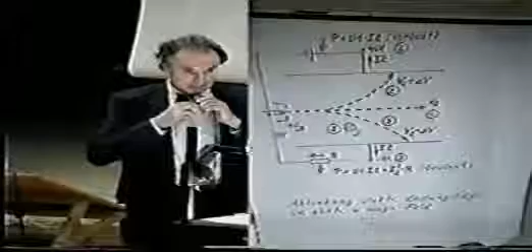Since several years I have received the press releases from Stan Meyer of the Water Fuel Cell Corporation. When I was asked to invite some US participants to this conference, Stan Meyer came to my mind immediately. So I wrote him a personal letter, and I'm very happy that he came over. He has about 40 patents related to energy. He is one of the most brilliant inventors, and I want to make this introduction very short to give him more time to present his water fuel cell. Stan Meyer, please.

Thank you. Thank you. I got a button here, right? You got a button? No, this is a microphone. Yes. And there's a button, how do you turn it on? Kann jemand den Slide-Projektor anschalten, bitte? 2, 3, 4. Can you hear me?

Before I begin, I would like to make a few announcements. Number one, in 30 minutes there's no way you can present the entire technology of the water fuel cell, because it covers 40 major patents and some revolutionary new technology. If you're interested, we do release a publication on this. Please contact Ike, and he will give you the address of our laboratories and water fuel cell. It's basically an overall view of our technology. It does not get into the full technical aspect of the technology.

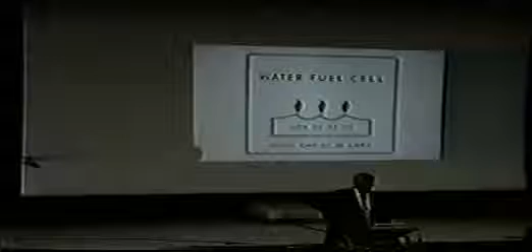Okay, back in 1975, I was very actively engaged in the retailing of truck parts, making well over $1 million a year profit. I'll try to go slower now. And when the Arabs threw the embargo on the United States, it alarmed me that a little country over in the Mideast could actually cripple the United States. Right now, based on the oil pressures in the existing fields of the world, whereby the United States dropped in oil pressure from 1965 to '75, we're now dependent on 60% foreign oil to maintain the industrial base of the United States.

The same thing that had occurred in the United States is also now occurring in the Arab fields, whereby their oil pressure is dropping three times faster than it occurred in the United States. The same thing that has been occurring in the Arab oil fields and that had occurred in the United States oil fields has also been occurring in the North Sea oil fields.

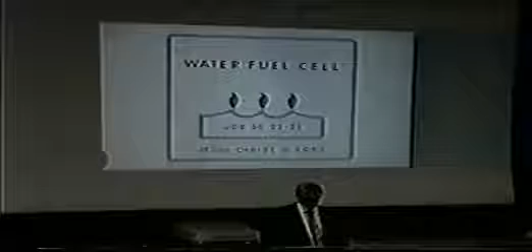And so therefore, back in 1975, it was imperative that we must come up with some form of alternate energy source if the economic base of the country is to survive. You have been hearing many new principles of technology at the Energy Symposium. Now let's take some of the knowledge that has been presented to you and see if we can't come up with an apparatus capable of using water as a new fuel source, both for its application and utilization of gas energy as well as electrical energy.

And I put the logo on there because the Lord, when he was talking to Job, asked him if he had known anything about the characteristic and knowledge of water. So the Lord really specified that the knowledge of water would come out at a time of great trouble.

In order to bring a new energy system into the country, it could not take one major or master patent to solve the energy problem. It had to take a myriad of many inventions integrated together to come up with a universal power system that could literally be utilized anywhere in the economy. What good would it be to develop a system that would provide home heating if we could not get the cars and trucks on the road moving with a new fuel source?

Or what good would it be if we put energy into industry, yet farmers would not have energy to process or plow their lands and harvest their crops? And if we had no way to apply an energy system to the military integrity base of the United States and other countries of the world, we would have a tremendous problem. So the main thrust in development of the water fuel cell technology was to hit every area of the economy and move in a bilateral movement in case and when the oil shortages start to hit.

We live in very unsecured times. Very shortly you will see tremendous vexation of lack of energy and the lack of energy supplies.

In my files back home in my laboratories, I have the most scientific compilation study on hydrogen that has ever come out of the scientific world through NASA, where the United States government spent more than $10 million to tell me that hydrogen was the most advanced, best or ideal fuel source that could be used and brought into the economy very quickly. But the report specified that there were three major areas that had to be addressed.

Number one, be able to produce the hydrogen gas economically, control the rate of its production, adjust the burn rate of hydrogen gas to co-equal that of the fossil fuels, and I added a fourth one: the ability to transport the hydrogen gas without spark ignition.

And of course I own all the patent rights both nationally and internationally on this technology. Not only have I been filing the patents on its base technology, but I've also been filing patents on the related technology, giving me a technological buffer zone to bring the technology into the world market area.

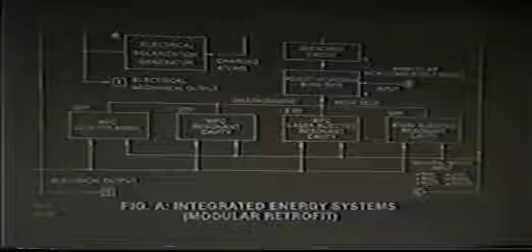Some of the major arguments that I used in the United States in releasing this technology was: gentlemen, number one, what happens if a foreign power can come into your land and use your own existing laws to block this technology from coming into existence? And of course, presidential executive action came into being to guarantee the processing of patents not only for the United States but even for the world.

Next argument was: gentlemen, if you do not have an economy, you will not have a government. If you do not have a government, you will not have a military. So it's the same type of arguments that I have been using in negotiating with many leaders throughout the world.

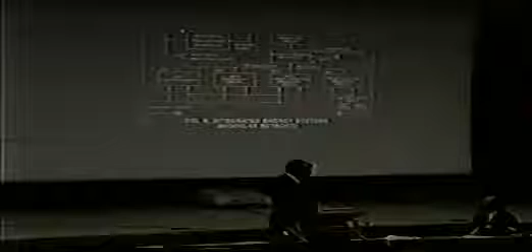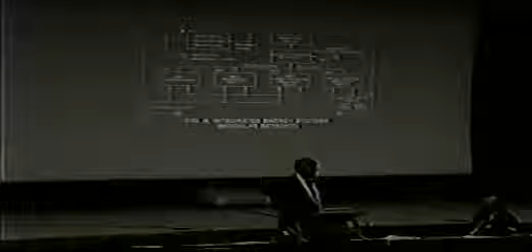The red zone signifies the development of hydrogen to be able to utilize it as a fuel source and render it safer than that of natural gas, and as a result use the water fuel cell technology as a retrofit energy system. It was paramount that this technology would have to be applied to existing energy consuming devices like your cars, your trucks.

We do not have the time, the energy, nor the monies to be able to convert the cars and trucks over to new power systems. It has to be a way that we can use a fuel source that we can very readily get ourselves available to, and water seems to be the most abundant fuel source on the face of this earth, if we can be able to release that energy from water economically.

The first thing that was confronting us was the fact of how in the world we could be able to switch off the covalent bonding of the water molecule without consuming a tremendous amount of electrical power, as opposed to the electrolysis process that we all know.

What we addressed was, number one...

First thing we considered was how in the world can you naturally be able to switch off the covalent bonding of the water molecule without consuming a tremendous amount of electrical energy.

So when we looked at the water molecule, we realized that when the hydrogen atoms unite with the oxygen atoms, under the law of physics, something's got to happen. When the oxygen atom accepts the hydrogen electrons, you develop an electrical imbalance by which you now have 8 protons as opposed to 10 electrons, so the oxygen atom takes on a negative electrical charge. Since the hydrogen atom is now sharing its electron, and since its proton is positively electrically charged, the hydrogen atoms will take on positive electrical charges. Therefore, the atoms of the water molecule are held together by an electrical attraction force.

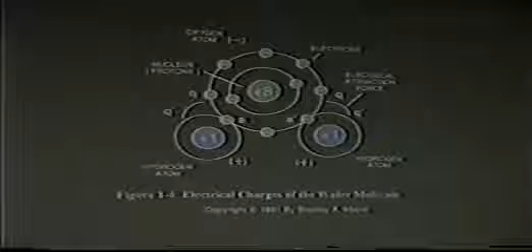We realize that as you expose the water molecule to a high pulse voltage frequency, and as you raise the voltage amplitude, we can take the water molecule into the liquid to gas ionization state. In the process, we restrict the amps and allow voltage to take over.

At the same time that we are exposing the water molecule to an external electrical force of opposite polarity to perform the work of splitting the water molecule, since water is a dielectric liquid... that's almost impossible.

Natural water is a dielectric liquid, and as such, when you expose the water to a high pulse voltage frequency, the water will actually take on an electrical charge.

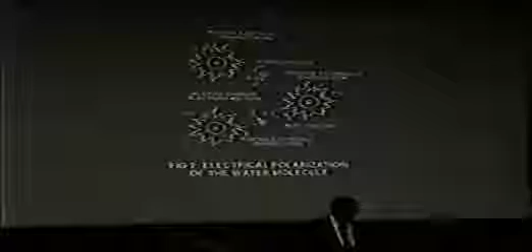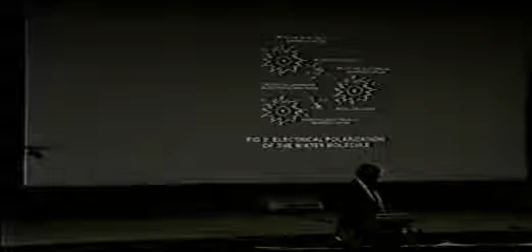So at the same time that we are splitting the water molecule by allowing the water molecule to elongate and change the time share rate of its electron, as the water takes on the electrical charges, the hydrogen positive electrical charges will increase at the same time that the negative electrical charge of the oxygen atom will increase. As a result, the negative charge electron, which is its covalent electron, is now being attracted to the positive charge hydrogen atom.

And since the oxygen atom has a negative electrical charge, a repelling action occurs, and therefore we are now switching off the covalent bonding of the water molecule, satisfying the first major requirement of NASA: being able to release hydrogen gas from ordinary natural water and do it economically.

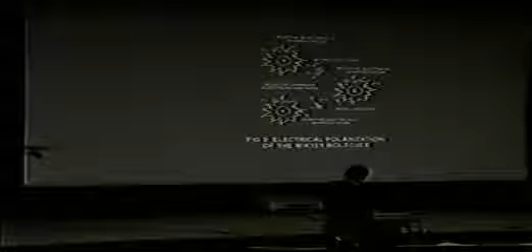This was one of the apparatuses which we had shown under rule 101 in the United States Patent Office and the World Patent Office, coming in to show operability. If you show operability, you receive your patents.

The water fuel cell technology is 180 degrees out of phase of the electrolysis process. We set up an environment.

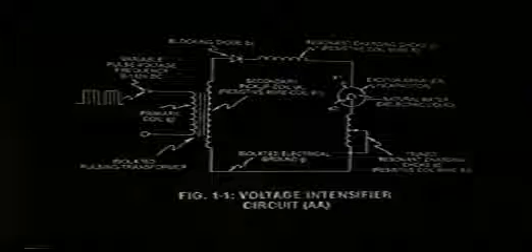So we're now putting two coils on opposite sides of the capacitor, forming a pulse frequency circuit by which, once you hit the resonant frequency of natural water, amp flow drops down to a minimum, allowing voltage to take off to infinity if the electronic components will allow that to take place.

Basically, what we're doing in the pulsing circuit is that as it enters into the resonant charging choke, it creates the electromagnetic field, which restricts amp flow to allow voltage to perform its work.

Now, in physics, we know, and have known for a long time, that voltage does in fact perform work. But heretofore, no one ever dreamed of using this technology to liberate hydrogen economically from water. So we're now restricting the amp flow and allowing voltage to take over.

We found out that once you restrict the amps and allow voltage amplitude to increase, hydrogen gas was being generated on an exponential function.

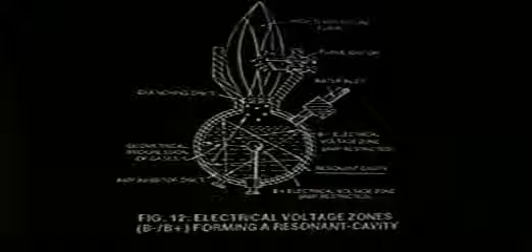Once we realized the fundamental operational characteristics and parameters of the electrical polarization process, we now raise the voltage amplitude by which we take the water into the liquid to gas ionization state. As we do so, the voltage potential is now ejecting or pulling away the electrons from the combustible gas atoms.

We found out that when you attenuate voltage amplitude in reference to pulse frequency, you will hit the phenomena of resonant action, by which you are producing a tremendous quantum leap in hydrogen generation over the prior art.

We also found out that once you hit resonance and subject it to the stimulation of the pulse voltage and then switch it off, the hydrogen will continually be produced on the power output stage. For example, once you hit resonance, we could excite it for 5 seconds and you're producing gas for 94 seconds. You divide 5 into 94, we were producing hydrogen gas 19 times more on the power output stage than on the power input stage.

We also realized that if you leave the pulse voltage frequency continuous or constant and don't touch the apparatus, hydrogen gas is now being produced on a geometrical configuration and will continue to increase in production until you reach the maximum flow rate of water going into the resonant cavity. So we now have another form of control for regulating hydrogen gas production.

These operational parameters now satisfy the second major requirement of NASA to use hydrogen as a fuel source: that we can control the hydrogen gas on demand.

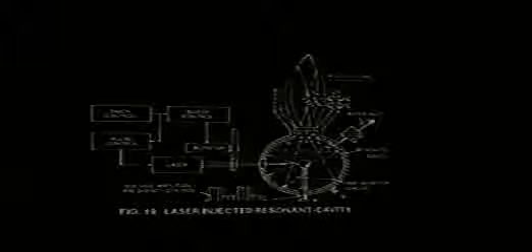We are now starting to aid the electrical polarization process by injecting laser energy into the system. By doing so, we're now causing an even faster and greater rate of hydrogen production to occur, as you see right here.

But we are also doing something else. We want to take the combustible gas atoms to an even higher energy state. This is an example of a laser injected resonant cavity.

Those cavities themselves like to be extremely small since they're taking on a form of capacitor. We use solid state lasers for injection of photon energy into the process. In electronics, these are simple little LEDs, light emitting diodes, but they will produce a coherent light. We don't need a large light intensity to accomplish the task.

We don't want to focus the energy down to a concentrated point. We want to allow the light, or the photon energy, to be absorbed by those liberated combustible gas atoms.

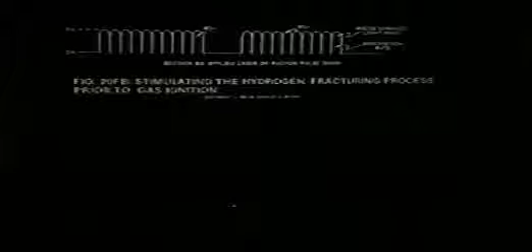There's an example of what happens when you subject water molecules to a high pulse voltage frequency and allow the laser pulse frequency to be superimposed within the process.

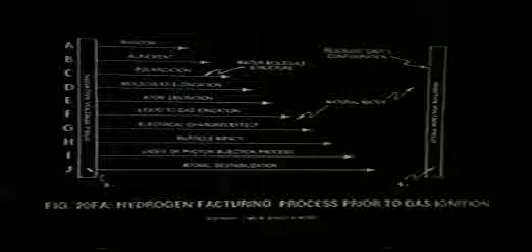As we started our experimentation, we realized there were many phenomena occurring in order to bring about the results of using hydrogen as a fuel source: going from the random state to the alignment, to the polarization, to the molecular elongation, to the liquid to gas ionization state. But we are also going down to the atomic destabilization of the water molecule.

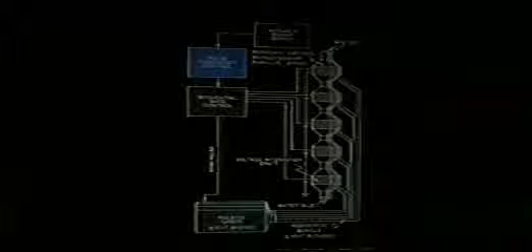For example, you can subject it to 110 volt pulse frequency, and yet you are compounding the increase of voltage equivalent to 1,000 volts in the upper resonant cavity. There's an example of a 3-tier resonant cavity configuration.

Now, once we found out that we can use hydrogen as a fuel source and release it and control its rate of production - hydrogen is extremely volatile, as we all know. If you ignite it with ambient air, it burns around 325 centimeters per second. The blue zone signifies the ability of rendering hydrogen safer than natural gas.

This is the number one area that gave us the ability to retrofit hydrogen to any existing energy-consuming device and do it economically, because if I can adjust the hydrogen burn rate to co-equal fossil fuels, then it is not needed for me, for example, to change the design configuration of an internal combustion engine. But we also had to comply with both federal, state, and local highway safety code regulations to render this type of fuel cell safer than water.

We addressed the phenomena of natural water, that water is like a sponge. It will absorb ambient air. Those who have gone fishing know that if you look at the gill of the fish, it simply agitates the water molecule to release the dissolved air.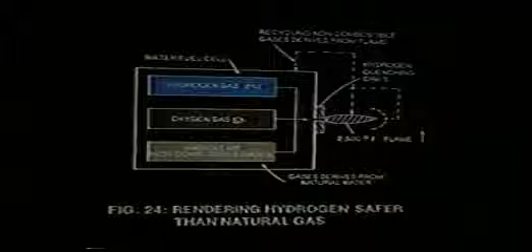This is an example of now sustaining and maintaining a hydrogen gas flame from ordinary natural water. The flame is burning around 42 centimeters a second. In the prior state of the art, that was totally, absolutely impossible.

Normally, when you burn hydrogen and oxygen, you cannot see it, nor smell it, nor taste it, because it's a very clean burning fuel. You'll see a small portion of the flame, actually being projected around 9 inches in height. The flame temperatures we have achieved range from 5,000 up to over 20,000 degrees.

The question now being asked is, we can sustain high temperatures to melt steel, but why does it not spark back into the generator? In all probability, if NASA had had this technology, our astronauts would not have died in vain.

But I was developing the technology when the accident actually occurred. And of course, I could tell you some very interesting happenings of events, like blowing a hole in the living room floor. I always believe in a moment of adversity there's something to learn.

So I knew I had to come up with a fail-safe fuel cell if it was going to be a viable energy system to put into the economy. So the quenching circuit technology was developed.

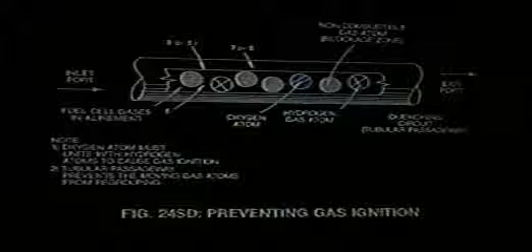Therefore, we came up with a very simple anti-sparkback device that was not dependent either on gas pressure or gas volume. In other words, anti-sparkback, or preventing a sparkback into the fuel cell, was now 100%.

As you see the small holes in the center of the disc, they form the quenching circuit. The disc itself is made out of ceramic material. The reason we used it is because we do not want the hole size to be elongated, and ceramic materials were extremely ideal to prevent oxidation from occurring when the liberated hydrogen atoms would go through other materials such as brass or steel.

We took that technology and extended it to form a quenching tube, by which we now can transport the hydrogen and oxygen gas. We can literally burn it, send a tracer bullet through it, and you will not ignite the gases going back into the fuel cell.

This solved the next major requirement of NASA, being able to transport the hydrogen gas without spark ignition.

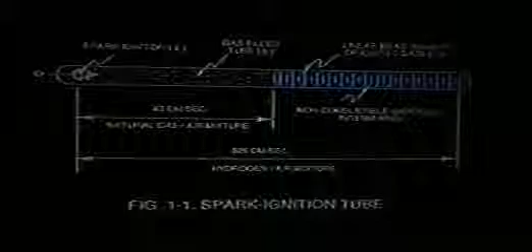This is an example of adjusting the burn rate of hydrogen gas. Irregardless of whoever comes up with a hydrogen generator, they're going to have to go through our patents. To give you a classical example, in a tube, if I would put hydrogen and ambient air in it and ignite it at one end, it would travel 325 centimeters a second.

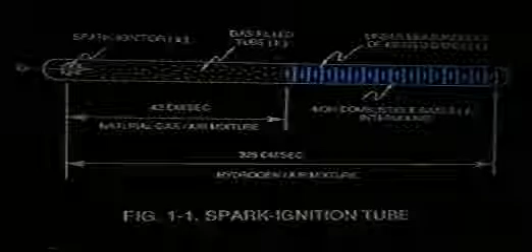Now, everybody knows about stoichiometric configuration. When I filed the patents in the United States Patent Office, they came back and said, 'Stan, we don't know what you're talking about, the adjustment of the burn rate of hydrogen gas. We understand stoichiometrics.' I said, 'Well, if I illustrate it to you, will you allow the patent?' He said, 'Absolutely.'

So we found out that hydrogen with ambient air will burn at 325 centimeters per second. We took natural gas as an example, put it in the same condition, and sparked it, and we found out that it would burn around 42 centimeters a second.

So it became very obvious that if I would mix non-combustible gases with the hydrogen and oxygen gases coming out of the fuel cell, I would use the non-combustible gas as a modulator to regulate the speed by which the oxygen atom would unite with the hydrogen atom. As a result, I now have the ability to adjust the hydrogen burn rate to co-equal that of all the fossil fuels, and I can adjust the hydrogen burn rate down to that of burning leaves or paper.

That gave me now the economics of being able to retrofit the fuel cell to any existing energy-consuming device in the economy. As a businessman, I am also a research and development engineer. You will see a videotape showing a dune buggy running on water.

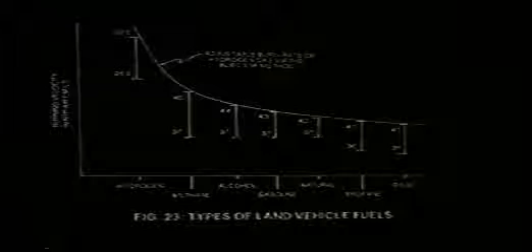I knew that I had to comply with the law of economics, which strictly means that the guy who comes up with the most economical way is going to win out. There are a lot of Cadillac ideas that come into existence, but they do not get out in the marketplace because they violate the law of economics. So the development of the technology was done under the premise: keep it simple. Use the KISS method. Keep it simple, stupid. Anyone ever heard of that?

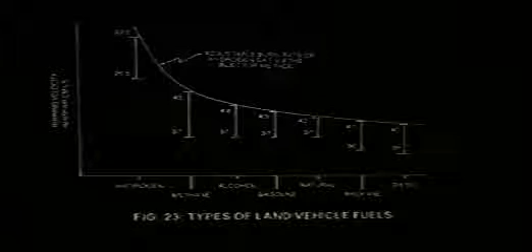Now we found out that as we were processing the gas, we were producing tremendous high temperature flames. But I was confronted with the fact that if I hooked the fuel cell up to a stove, the wives would get really irritated and mad at us, saying, 'Look, you burn holes in our pots and pans.' So the next step was, how can you adjust the burn rate to go from 5,000 degree temperatures down to 200 or 300 degrees, and do it under the law of economics?

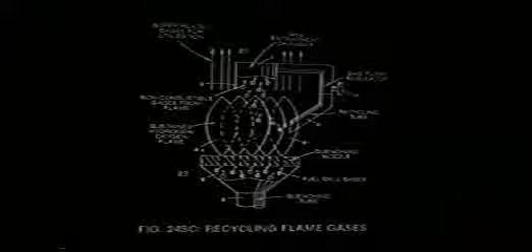It was very obvious that the gases coming out of the fuel cell could be recaptured, going through the flame, recycling back into the flame or back into the generator. As a result, by regulating the flow rate, we can now adjust the burn rate of hydrogen gas to any temperature level we desire. Now, since I'm using the gases coming off the flame, does it cost anything? No, zippo, other than the apparatus itself.

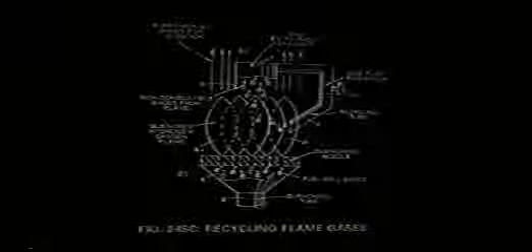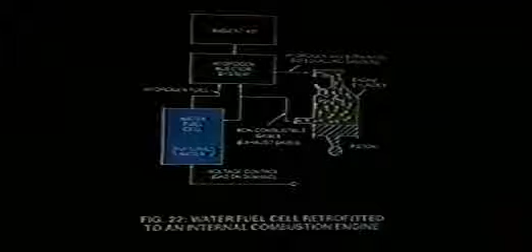Now, prior technology involved changing the design of the engine and the compression strokes, and trying to use very exotic materials. The key was that we need the cars and trucks to run. So how do we run an internal combustion engine? As an engineer, you look at this in three ways. Number one, the engine is a mechanical drive device. Secondly, it's an air pump—it pumps air through the carburetor and sends it out the exhaust.

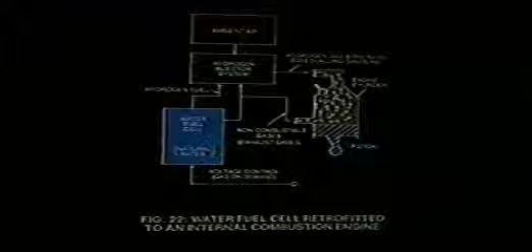Thirdly, you look at an internal combustion engine as a manufacturer of non-combustible gases. So we simply take the gases that have gone through the burning process, which has eliminated the burning product in the fuel and also eliminated the oxygen atom, and meter it back into the fuel cell. We're now automatically adjusting the burn rate of that hydrogen gas to co-equal that of gasoline or diesel fuel, and as a result you do not have to change any of the design characteristics on an existing engine.

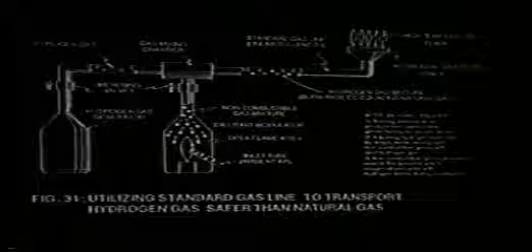We've now taken the technology to the point of being able to transport the hydrogen gas through a conventional gas grid system. Prior art dictated that you would cool the hydrogen down to around minus 400 and some degrees, put it under pressure, and transport it down the road by trucks. This type of technology now gives us the ability to transport the hydrogen gas through existing gas grid systems without even changing one piece of hardware.

We simply take the ambient air, which is one of the cheapest commodities on Earth, expose it to a flame to produce the non-combustible gases that now mix with the hydrogen gas, and as a result we can adjust the hydrogen burn rate to that of natural gas, or even adjust it lower. Therefore, we now have a very safe way of transporting hydrogen gas that exceeds the prior art of the technology.

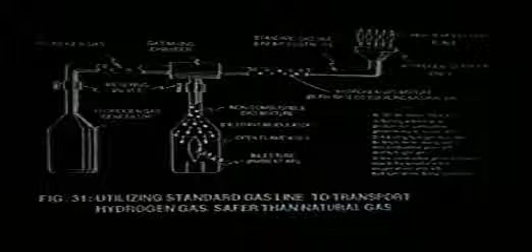Now we come to the point that, as we know, you burn hydrogen and oxygen, the byproduct is water, and so therefore we want to use and recapture the water and recycle it back into the generator. So inherently the fuel cell is a fantastic water purification device.

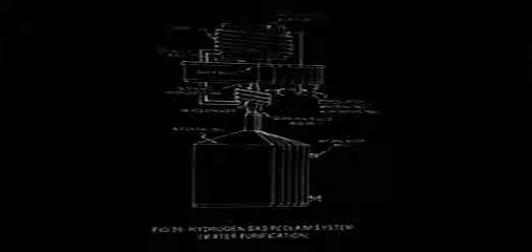To accomplish this, we now use the old method of gas-fired refrigerators, as you probably knew when you were young, where you take a flame and heat a gas, and as you circulate the heated gas through a gas expansion chamber, the gases expand and you get a cooling effect. So the superheated gases coming off the hydrogen flame are condensed down and cooled back into water vapor.

And since the electrical polarization pulls apart the water molecule by physical force, any contaminants in the water remain in the fuel cell. As a result, if any bacteria leaves the water and attaches itself to the liberated gases, it cannot and does not live through exposure to a 5,000 degree flame.

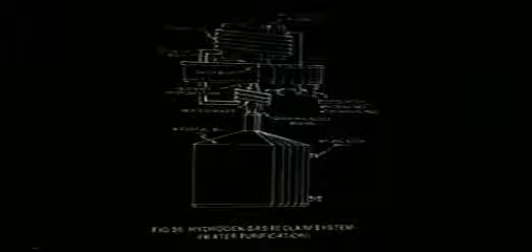So inherently, the characteristic of the fuel cell gives us the ability to purify water and even go into desalination of salt water, and do it in a way that we do not use any chemicals or filtration of any sort.

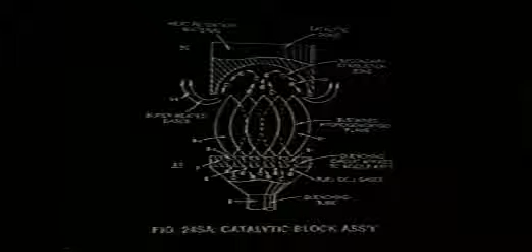In order to comply and ensure that we have a system that does not produce nitrous oxide, which would be minuscule in application, we expose it to a catalytic block, allowing the design of the hemisphere itself to redirect any gases back into the flame that may escape the combustion process. As a result, we have a way of converting 100% of the gases coming out of the fuel cell.

Now, this is an example that we've designed also to comply with Murphy's Law. Any of you who have done development know Murphy gets in the way. So in order to prevent leakage of hydrogen gas, we are adjusting the quenching circuit so that if you have a blowout, the adjoining flame will reignite the gases coming out of the fuel cell.

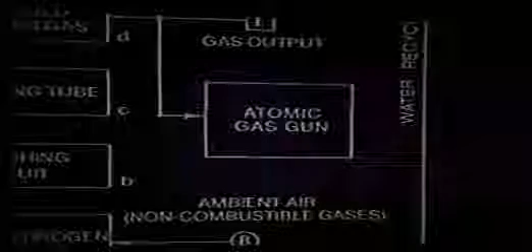Now, as we know, when you burn hydrogen and oxygen gases from water, the gas combustion process releases thermal explosive energy up to 2.5 times that of gasoline. But there is a phenomenal amount of energy in water if you are able to tap into it.

Einstein suggested that there was enough energy in water that you could literally take a 1,000-car train around the earth many, many times if you could tap into the process.

Now, we all know what happened to the nuclear industry. I was in Washington, D.C. in 1965 when they were trying to come up with a fail-safe nuclear power system. Three days into a meeting, I got up and said, 'Gentlemen, everything you have said in this meeting is a bunch of malarkey, because as you subject the radiation to our materials, you will have the hourglass effect.' Unfortunately, Three Mile Island occurred within the time that I had prophesied back in 1965.

But can we now tap into an even greater source of energy? When the Arabs threw the embargo on the United States, it alarmed me that if we would not get our cars and trucks on the roads again and start moving very quickly, the food supply chain in the United States was only 27 days.

When I made a technical presentation to General Bouchard at Wright-Patterson Air Force Base and General Abramson at the Pentagon, I said, 'Gentlemen, I want to remind you that during the Arab embargo, you only had 2.5 days of aviation fuel to fight a war. And I don't care how sophisticated an aircraft you have on the runway, if you have no way of powering that jet, it's a piece of junk.'

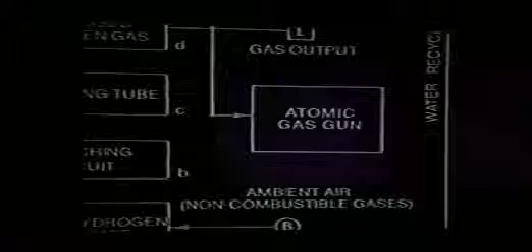Now, you know and I know the generals don't like to have their equipment called a piece of junk. So it's very important that we bring new technology into the economies of the world. We also have to be able to protect the military base of the United States.

So as we liberate the gases from water, we are now resubjecting those liberated gases to an even higher pulse voltage frequency. We are restricting the amps and allowing voltage to take over to perform its work. We are now injecting laser energy into the process to aid the ejection of the electrons.

When do we have to leave the airport? What time? 3:30. It's running out. Well, we'll go on. Yeah, we'll go on, okay.

So basically what I'm doing now is taking the combustible gas ions and bringing them into a subcritical state. I've pulled off the electrons. I have now subjected them to photon energy, and what I am doing is taking combustible gas atoms and putting them into a subcritical state.

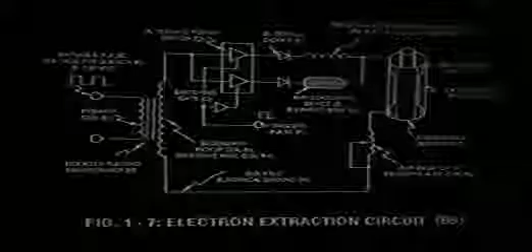In order to do this, I had to invent the electron extraction circuit, which shuts off the flow of amps and voltage to eject the electrons. I then come up with an alternate way of redirecting those liberated negative electrons. If you apply the B plus across a filament of a light bulb, the negative charge electrons will go into the filament and interact to produce heat in the form of light energy.

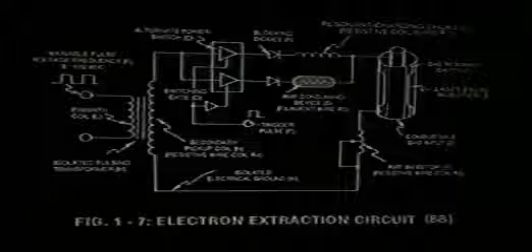What I'm now illustrating is that not only are we setting up the condition to bring about the hydrogen fracturing process, we are now producing electrical energy simultaneously, which can be recycled back into electronic circuits to aid the voltage intensifier circuit to perform the electrical polarization process.

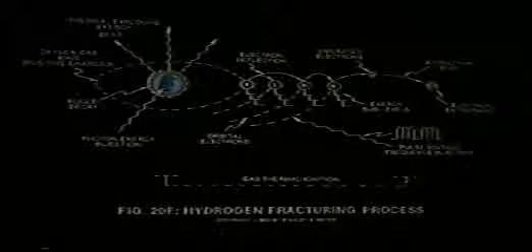This is an example of injecting the combustible gas atoms with laser energy, which causes the electrons to go to a higher energy state, allowing electrons to be ejected from the oxygen atom as an example. By subjecting it to the pulse voltage frequency, we pull away the electrons and consume them, not allowing them to go back into the process. So we are now keeping the combustible gas atoms in a very critical state.

To do this, we developed what is called the hydrogen gas gun technology. Basically, we know that when you ignite hydrogen and oxygen gases, it releases thermal explosive energy up to 2.5 times that of gasoline. The scientific question at this point is: what happens during thermal gas ignition of hydrogen if you could prevent the formation of the water molecule from occurring?

In other words, if you could prevent the formation of the water molecule from occurring and it could not reach a stable state, then that explosive energy would keep continuing to be released from the process until either a new atom structure is formed or an implosion effect releases pure energy.

Since the energy problem has been occurring in the scientific world, Livermore Laboratories has been trying to use hydrogen fusion, as you know, by taking hydrogen and subjecting it to high temperatures and high pressures around 10 million degrees, putting it in an electromagnetic bottle and trying to release its energy.

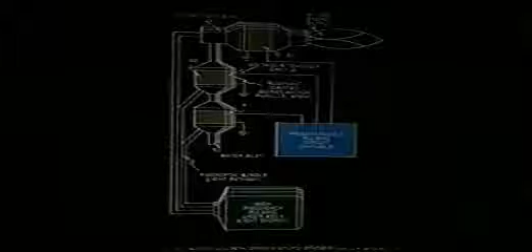This is an example of taking a hydrogen gas gun and putting it on top of the resonant cavity. As a matter of fact, the hydrogen gas gun can be reduced down to the size of a spark plug, or the gas injector system of an F-15 or F-18, and literally fly an F-18 or F-15 on the atomic power of water.

This is some of the electronic circuit interfacing that gave us the patents worldwide on this technology.

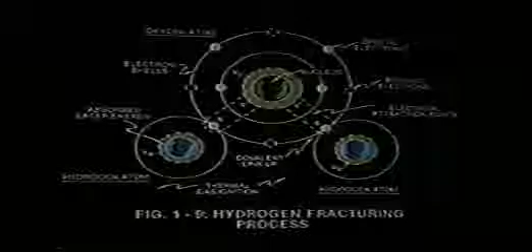Now, to give you an example of the hydrogen fracturing process to prevent the formation of the water molecule: Ike and I are on a basketball court, and he's the hydrogen atom, and I'm the big oxygen atom. I'm 8 times bigger than he is. Now, what I've done is I've zapped Ike with laser energy, and because I hit him with laser energy, his electron migrates farther away from the nucleus. As a result, the electrical attraction force between that electron and nucleus becomes weakened. So he is now in a weakened state.

But I am the big oxygen atom, and I've got 2 missing electrons, and the law of physics says I want to stabilize, and I need some electrons. But I'm also injected with laser energy, and I'm in a highly energized state, and that absorbed laser energy and the nucleus are preventing me from going back to a stable state.

So I have an abnormal state, I'm in a subcritical state, and then I am subjected to thermal ignition. As a result, the hydrogen and oxygen atoms seek to come together to form the water molecule, but it is not in a stable state. An avalanche effect occurs, and once stabilization cannot occur, you start to release thermal explosive energy of a fantastic magnitude.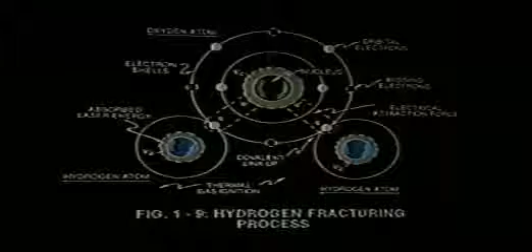In this hydrogen fracturing process, the potential yield is 2.5 million barrels of oil per gallon of water. And since there is no neutron interaction in the process, it is a very clean process.

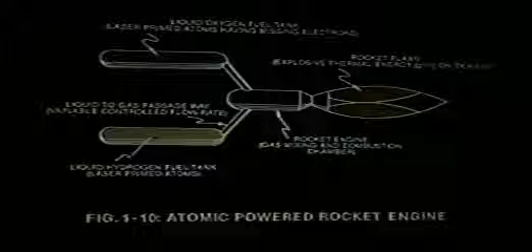So we now have the ability to retrofit the technology to any form of aircraft you so desire, even rocket engines. We can take even the liquid hydrogen and liquid oxygen, subject them to the hydrogen fracturing process, and obtain tremendous Mach yields, where the United States was originally developing a hydrogen-powered aircraft to go Mach 25. It is now slated to go Mach 150 in outer space with this type of technology.

We now found, since voltage stimulates the process, we could not rely on prior generators to give us the economics and reliability to operate both under the seas as well as in space. So all of these electrical generators and the type of technology had to be developed to give us the form of economics.

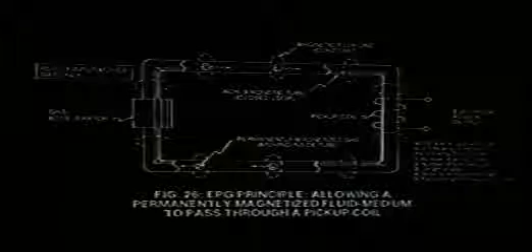I would tell many people in our presentation that the Lord had given me a phenomenal electrical generator. Here are the following characteristics: it has only one moving part that never wears out, it has no bearings, it has no contact brushes. I can give you single or 3-phase or multi-phase power output, and if that doesn't bother you, I can drop it in a bucket of water and it will never short out.

Now they would start to laugh at me, but once I start showing the technology, they stop laughing. Now anytime you can get 3-star generals out of their chairs in 10 minutes in the Pentagon, you're doing something, right?

So in order to overcome the opposing magnetic fields associated with rotary electrical generators, the EPG system technology was developed.

Basically, the technology centered around...

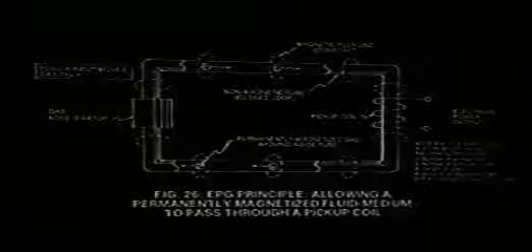Seven minutes past. It's already seven minutes past. Okay, how far do you want me to go? Hurry up. Okay, you said it's 3:30.

To apply an energy system to the military integrity base of the United States and other countries of the world, then we would have a tremendous problem. So the main thrust in development of the water fuel cell technology was to hit every area of the economy and move in a bilateral movement in case and when the oil shortages start to hit.

We live in very unsecured times. Very shortly you will see tremendous vexation from lack of energy and lack of energy supplies.

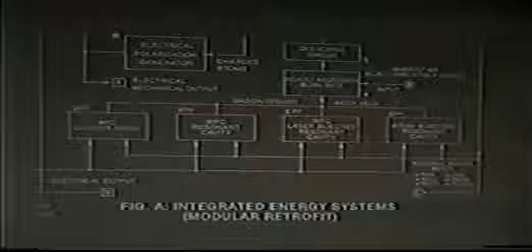In my files back home in my laboratories, I have the most scientific compilation study on hydrogen that has ever come out of the scientific world through NASA, where the United States government spent more than $10 million to tell me that hydrogen was the most advanced, best, or ideal fuel source that could be used and brought into the economy very quickly.

But in the report it specified that there were 3 major areas that had to be addressed: number one, be able to produce the hydrogen gas economically; control the rate of its production; adjust the burn rate of hydrogen gas to co-equal that of fossil fuels. And I added a 4th one: the ability to transport the hydrogen gas without spark ignition. And of course I own all the patent rights, both nationally and internationally, on this technology.

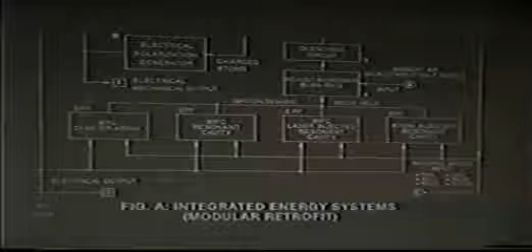Not only have I been filing the patents on its base technology, but I've also been filing patents on the related technology, giving me a technological buffer zone to bring the technology into the world market area.

Some of the major arguments that I had used in the United States in releasing this technology was: gentlemen, you have been hearing many, many new principles of technology in the Energy Symposium, and now let's take some of the knowledge that has been presented to you and see if we can't come up with an apparatus capable of using water as a new fuel source, both for its application and utilization of gas energy as well as electrical energy.

And I put the logo on there because the Lord, when he was talking to Job, asked him if he had known anything about the characteristic and knowledge of water. So the Lord really specified that the knowledge of water would come out at a time of great trouble.

In the development of the water fuel cell technology, the main thrust was, number one, legalize its technology. Do not blow your ego, because it was imperative that this technology would be protected for the world economic market. In order to bring in a new energy system into the country, it could not take one major or master patent to solve the energy problem. It had to take a myriad of many inventions integrated together to come up with a universal power system that could literally be utilized anywhere in the economy. What good would it be to develop a system that would provide home heating if, in fact, we could not get the cars and the trucks on the road moving with a new fuel source? Or what good would it be if we would put the energy into industry, yet farmers would not have energy to process or to plow their lands and harvest their crops? And if we had no way, for an example...

Since several years I have received the press releases from Stan Meyer of the Water Fuel Cell Corporation. When I was asked to invite some US participants to this conference, Stan Meyer came to my mind immediately. So I wrote him a personal letter, and I'm very, very happy that he came over. He has about 40 patents related to energy. He is one of the most brilliant inventors, and I want to make this introduction very short to give him more time to present his water fuel cell. Stan Meyer, please.

Thank you. Oh, I got a button here, right? You got a button? No, this is a microphone first. Yes. And there's a button. How do you turn it on? Can someone turn on the slide projector, please? 2, 3, 4. Can you hear me?

Right now, based on the oil pressures in the existing fields of the world, the United States' oil pressure dropped from 1965 to '75, and we're now dependent on 60% of foreign oil to maintain the industrial base of the United States. The same thing that had occurred in the United States is also now occurring in the Arab fields, whereby their oil pressure is dropping 3 times faster than it occurred in the United States.

The same thing that has been occurring in the Arab oil fields and that had occurred in the United States oil fields has also been occurring in the North Sea oil fields. And so, back in 1975, it was imperative that we must come up with some form of alternate energy source if the economic base of the country is to survive.